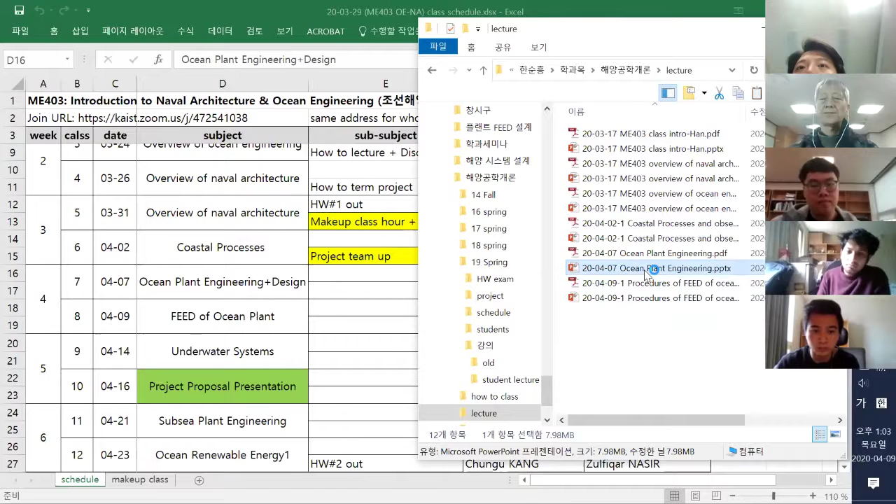Okay, then we go on to my part of the class. So, ocean plant engineering, this one. All right, and we stopped around this one.

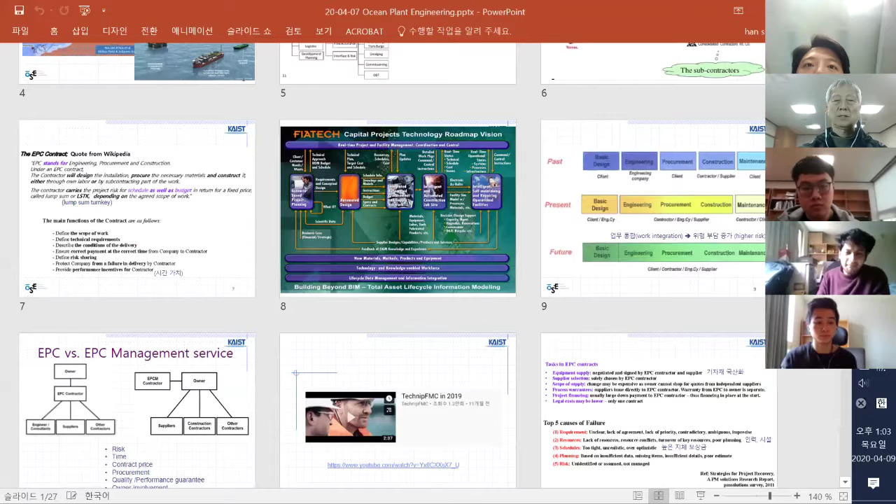So collaboration among several different domain experts is required for plant construction, including instrumentation and control, piping layout and process, chemical process, electrical, equipment, mechanical, civil, and health, safety, and environment.

So by process, you mean it's chemical process only? Usually, not always, but usually. Plant - how can you say a power plant? Nuclear power plant, it's also a plant, right? But there are not so many chemicals there.

Okay, but if you count all the plants around the world, I guess more than 50% is chemical process, including oil and gas, pharmaceutical, water treatment.

Oil rigs, is that a chemical process? Oil rigs, yes, they process oil to make clean gasoline or diesel. Isn't that a physical process? Okay, you are saying there is no chemical reaction sometimes, right? Yes, but there, yeah, right. I'm not sure whether there may be a little chemical reaction inside, the kind of...

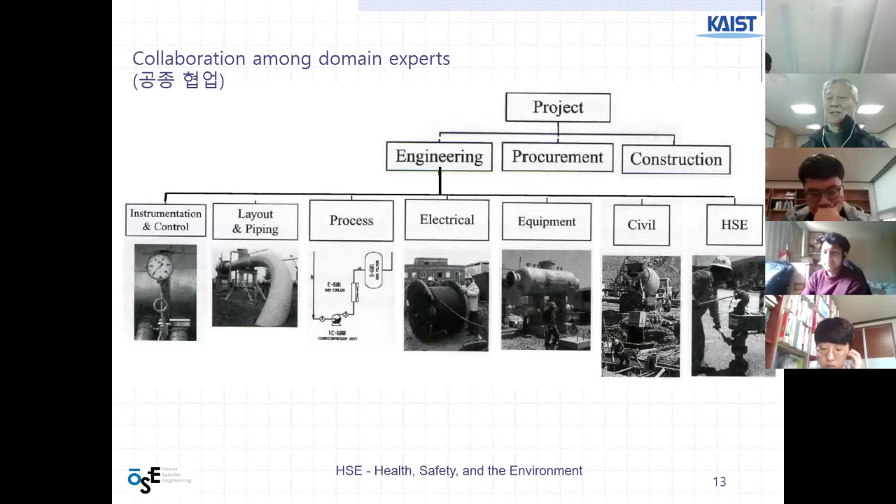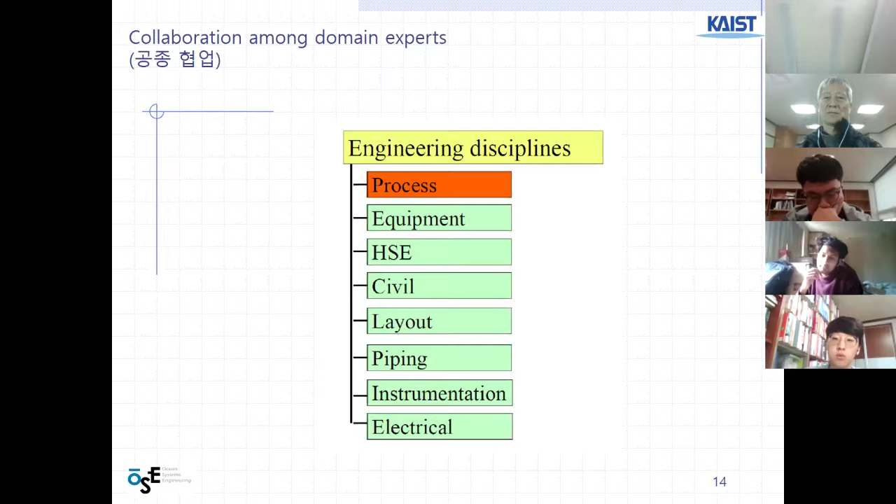All right, let's go on to next slide. Same concept with a different figure. There are engineering disciplines. Process is a chemical process. Equipment is mechanical, usually health, safety, civil, layout, piping, instrumentation, electrical, almost same. And there's a table of discipline, engineering discipline, and activities.

Activity means some kind of producing drawings, design drawings. Diagrams is also a kind of drawing, design. So geographical drawing, architecture drawing, calculation, equipment or material specification, data sheet, site works specification. Those are necessary documentation or drawing for plant construction and engineering.

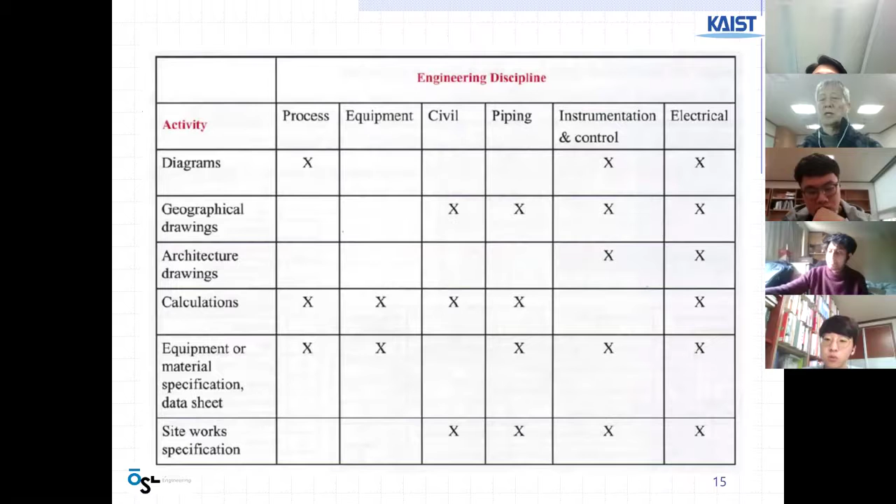And at each discipline, the process engineer, chemical engineer, they produce diagrams and calculation and equipment. Equipment is usually mechanical, civil, piping, right? So they do electrical work. All right. And the safety or risk from ocean plant project - I mentioned some in the previous session on Tuesday.

Each project requires different specification for equipment and design. Let me explain this way. I want to build my home at Daejeon area somewhere. But I did already 10 years ago - I did build my home another place. So this time I want to make another new home to build for my family.

But 10 years ago, it was a wood-made home, so it is different from this time. This time I want to make a brick or brick-based home. And also my family members are different because my children are already grown up and married. So we only have my wife and myself, 2 persons, and also 10 years older than before. So this time I want to build a different home. And this one - so I could not build myself my home, right? I should ask some constructor, give them money and give them my idea, and then they build for us.

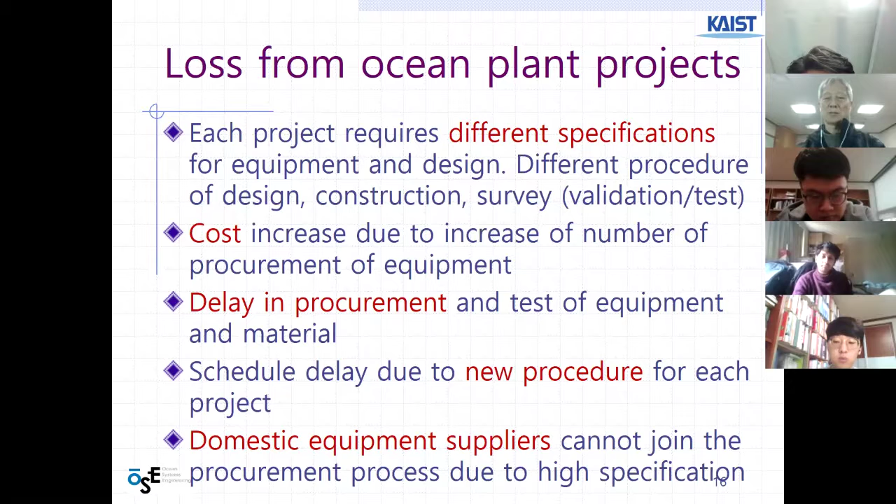So domestic suppliers, instead of importing, cannot join the procurement process due to the high specification. This is for Korean shipbuilding companies, where the owner is coming from Norway or Greece. The requirement specification coming from the client is very high level in terms of reliability, quality, and safety. But the supplier or maker producing such equipment from China or Korea is not capable of producing such a high level of safety or reliability. Then we need to purchase from another country, from a Western country or something. So it can cause a delay.

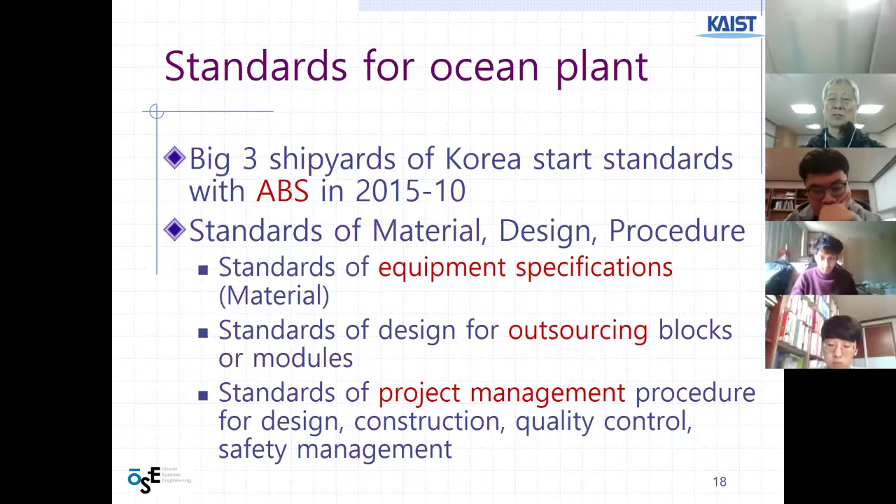Standard is important for ocean plant. In Korea, the big three shipyards are Hyundai, Daewoo, and Samsung. They started making a standard with ABS, the American Bureau of Shipping, a shipping registration classification society of the United States. The work items are material, design, procedure, equipment specification, outsourcing blocks and modules, and project management procedure. So they need a standard in this area.

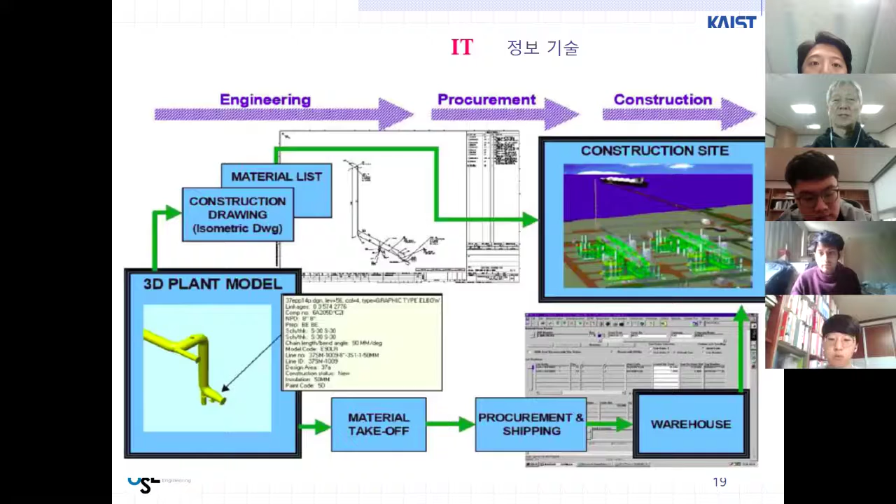So tags, documents, and something like a project. Let's go.

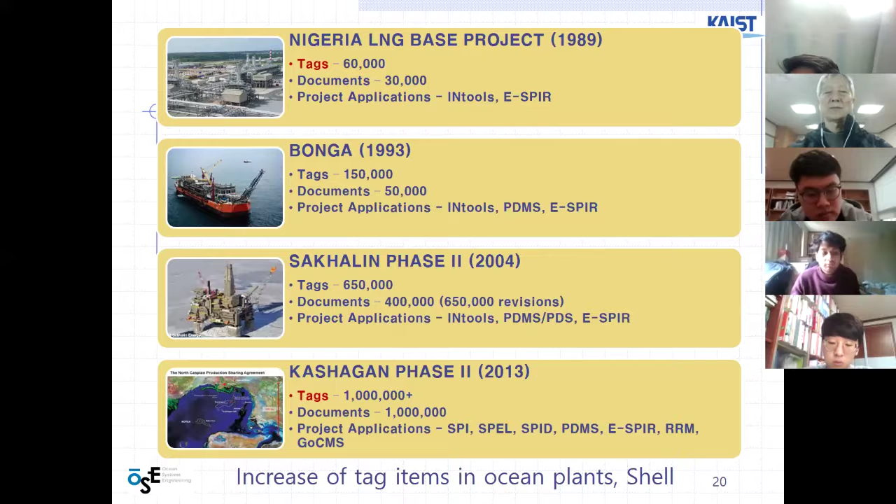For my home construction, I do it myself. So the builder or local builder doing my new home building with brick wall and French chandelier, sometimes he calls me because he wants to see me and check his progress, and also make small decisions like this - approval for construction. So he called me that he finally got the chandelier coming from France. My wife wanted to check whether this is the same one she saw from her friend's house. So he makes sure before he does the attachment for the installation.

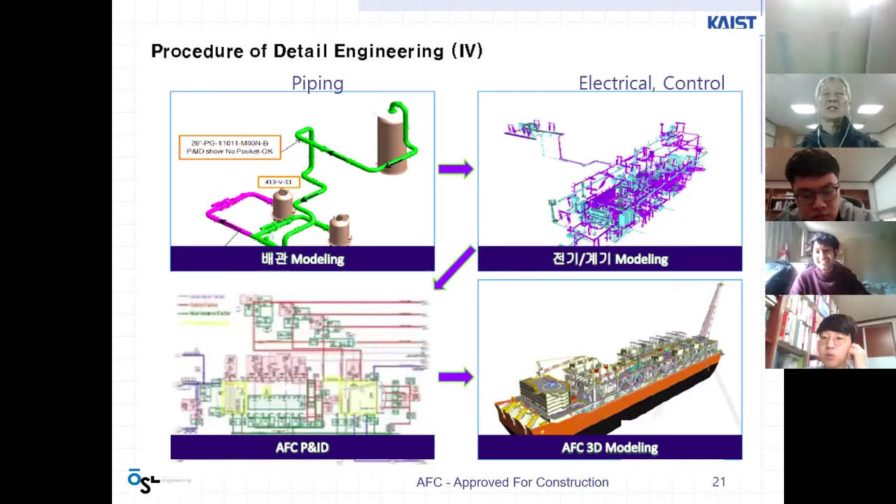It takes much more time than expected. Any questions?

Just one question - is this a true story? The chandelier story? I have a similar story, but not the same. Exactly. Okay, right, okay, not exactly. Right, because my wife has a special requirement too. Myself too, right.